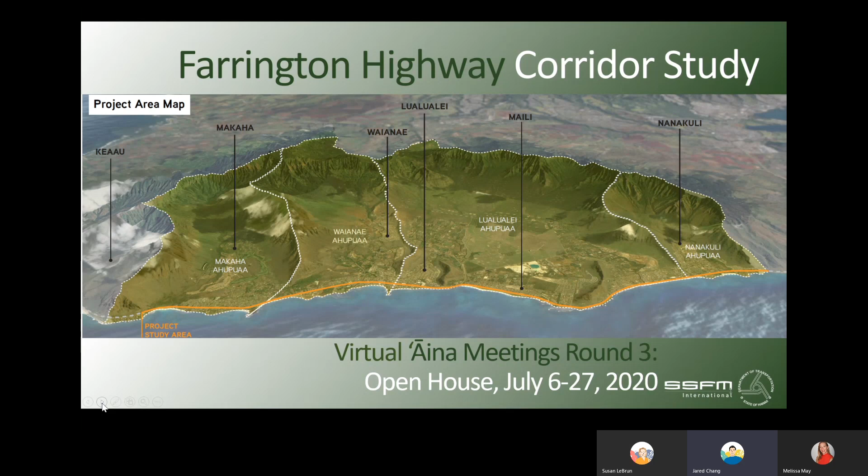We're going to start by introducing our project team and reviewing the presentation goals. This HDOT Highways Division study is being conducted by the Highways Planning Branch under Ken Tatsuguchi. The HDOT project manager is Patrick Tom, and he is supported by Jill Tanabe, Pua Ayu, and Shelly Kuneshige. SSFM International is the prime consultant for HDOT, and our team is led by Susan LeBrun with support by SSFM planners and traffic engineers, as well as a Westside community outreach team, including Puanani Burgess, Puaena Burgess, Pat Uchi Gakuyuchi, Dr. Lelemia Irvine, and Oceanit.

In this presentation, we will be providing a project status update and share what we have heard so far through community outreach. Then we'll present the proposed solutions, phasing, and priorities based on community input, and finally share how you can continue to provide your input to the project team. Goals for this meeting include continuing collaboration with the Westside communities to develop solutions for Farrington Highway, sharing back with you the community input that has been received so far, presenting the priority solutions for each community, and continuing community outreach on priorities and phasing via our online open house webpage and upcoming virtual Q&A sessions.

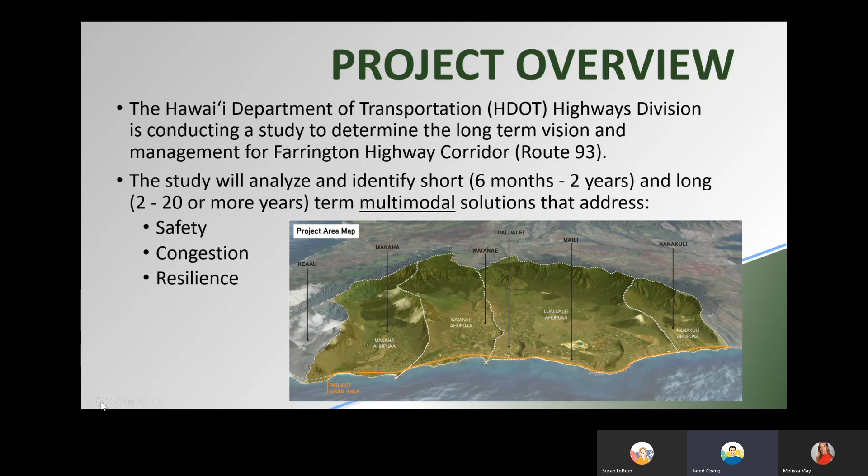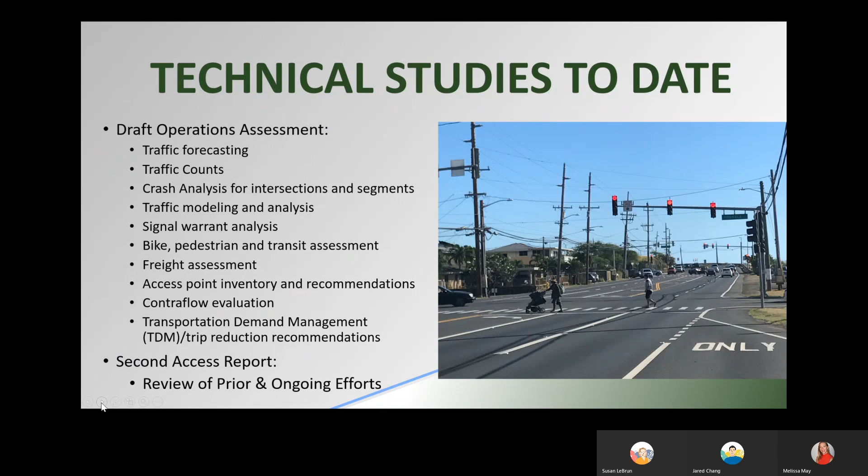Finally, as part of this project, we are working with Oceanit to engage students and teachers in a program that utilizes Oceanit's Aloha AI technology. This is a multi-session student program that they volunteer for to have students and teachers learn and use artificial intelligence to solve real-world problems and questions. The Aloha AI program is currently underway, and the sensors that they plan to use, which are cellular based, are being readied for implementation in July.

Once they collect the counts from these sensors, they'll be uploaded to an online database with access for each student. And the counts will be used to assist in this study, looking at each multimodal solution, as well as the 5th lane extension from Nānākuli up to Hakimo Road. And that concludes the quick update of the project status. I'm going to turn it over now to Melissa May, who's going to discuss the community mana'o that we've heard so far.

Aloha, everyone. My name is Melissa May. I'm a planner with SSFM, and I'm going to be going over some of the highlights of community input to date from all of our engagement efforts. And you can find the documentation from a lot of these prior meetings on the project website, which we'll list later in the presentation. But just a brief recap of what we've done so far.

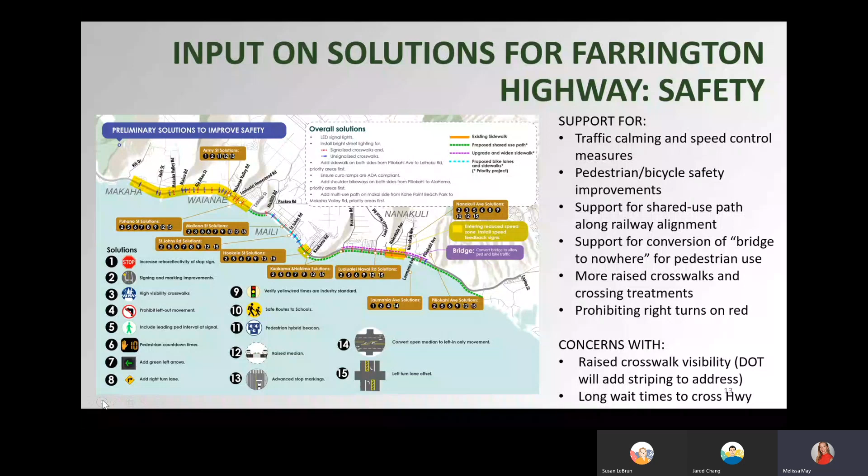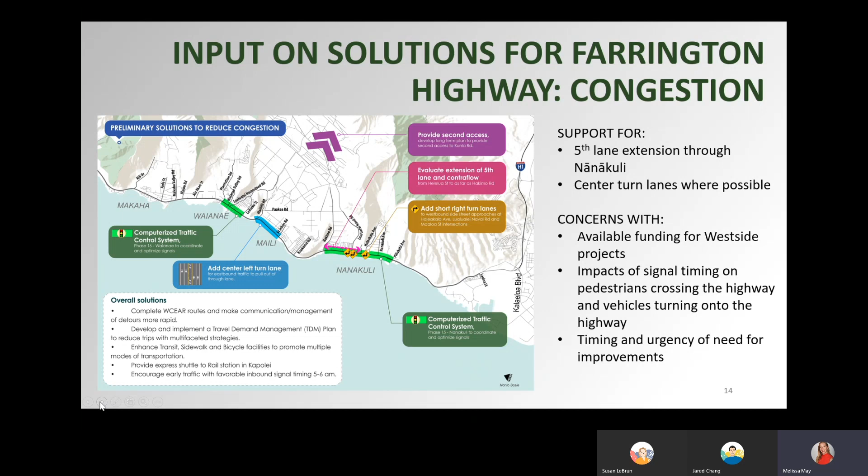They expressed concern about available funding for Westside projects, making sure that these projects are a priority and will get the funding. They also expressed concern about signal timing because the long wait times for pedestrians crossing the highway and cars trying to turn off of the side streets can be an issue. And just emphasizing the timing and the urgency of the need for improvements to this area.

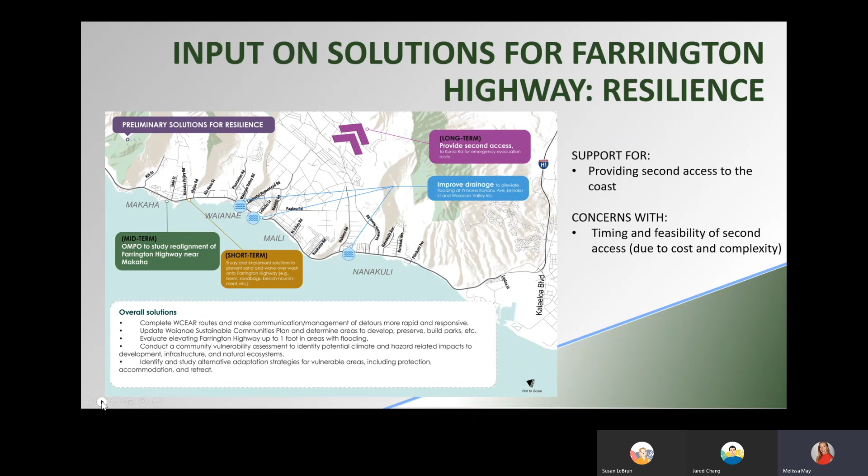And then finally, our discussion about resilience mainly focused on the second access and the need for long-term second access as a solution. And people understood and were concerned with the timing and the feasibility due to the cost and complexity and the multiple agencies that would be involved. We also talked about drainage as a solution to resilience. And with that, my portion of the presentation is over, and I will hand it over to Sue LeBrun.

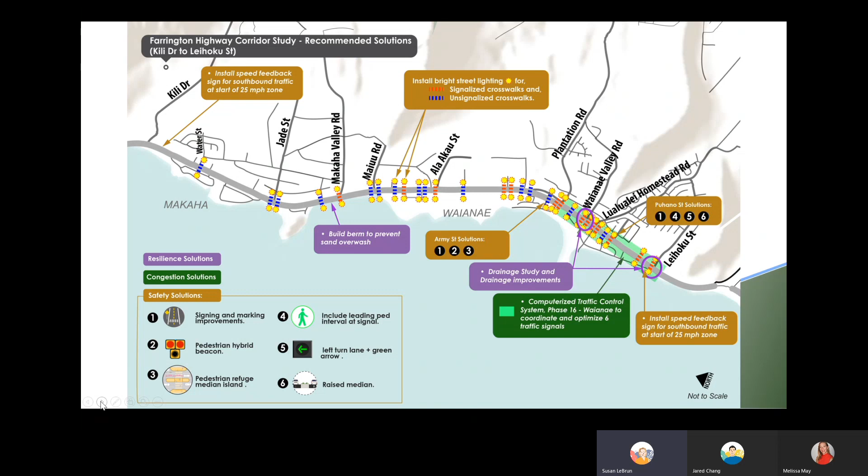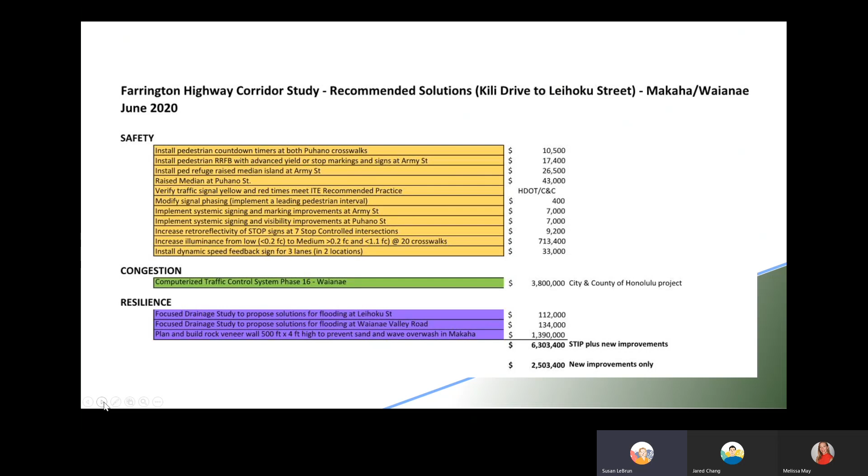Next slide. So we assigned costs to each of these improvements. And you can see them here divided into the safety, congestion, and resilience bins. And then on the next slide, we've prioritized them and given them phases 1 and phase 2. Phase 1 is more short-term, 6 months to 2 years, and that's something we can do quickly because it's within the right-of-way, and at least for those first ones, they're pretty low cost. And they have a high benefit to cost ratio, can be easily implemented.

Then there's the short-term medium cost for increasing the illuminance on the streetlights. There's 20 crosswalks. So this assumes a new pole at each end of each crosswalk. So it's getting up there to $700,000. And then for the computerized traffic control system, that's already a City and County of Honolulu project that's underway.

Then for the 2 to 5 year time frame, there's building the rock veneer wall at Mākaha Valley Road. That will probably be about a $1.4 million effort, but it will also need permitting because it's outside the right-of-way. However, it's needed, and people are getting sand on the road there and having to deal with that and removing it almost every day. So that could be considered an intermediate term priority. And then also the focused drainage studies at Leihoku Street and Waianae Valley Road.

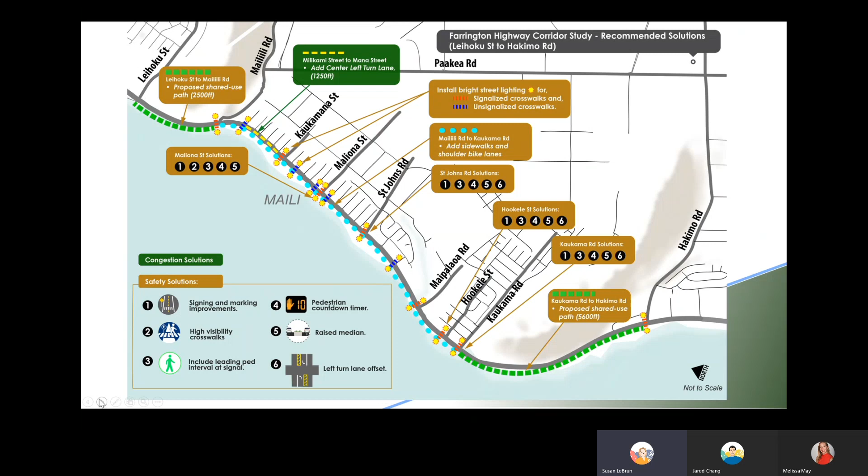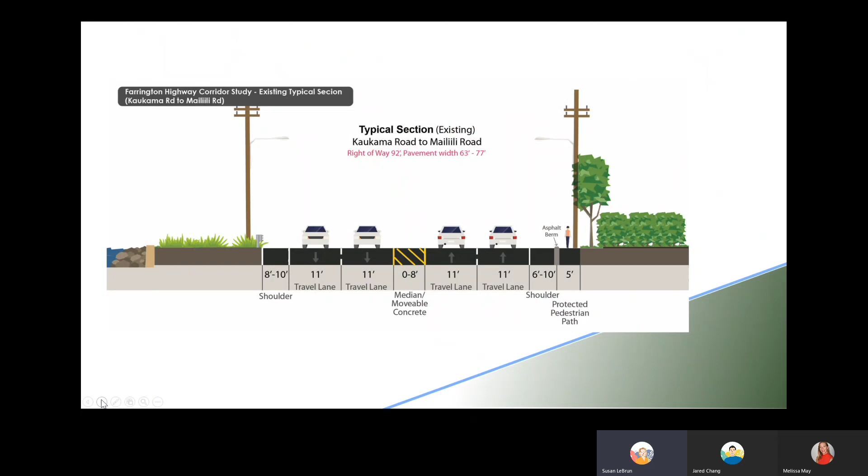So we've broken those costs, there's this typical section. This shows the existing section between Kaukama and Mailiili. And then the next slide shows the proposed. We already have the shoulders here, but on the next slide, you'll see that we're showing what it looks like with that center two-way left turn lane on that short segment. And also there's sidewalks on each side with curb and gutter. Next slide.

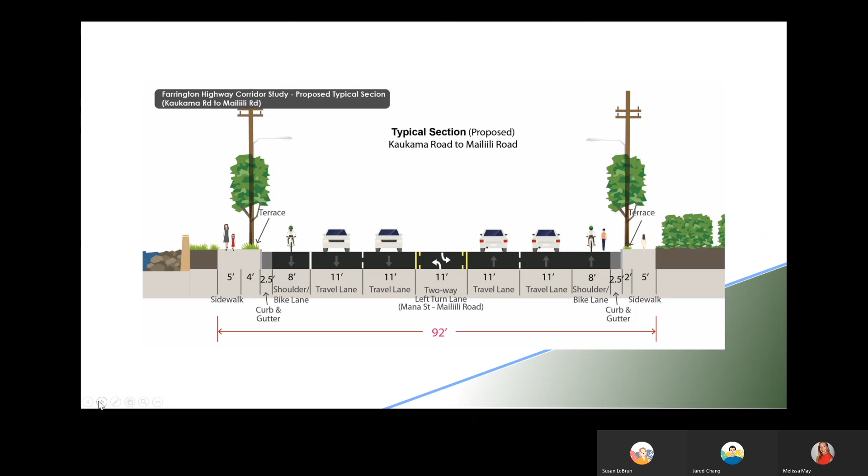We have these costs broken down into the safety and congestion bins. And then if you go to the next slide, we can see how they're phased. Phase 1 and 2, short term and intermediate term. The short term includes those quickly implemented low cost countermeasures with the high benefit to cost ratio. And then there's increasing the illuminance on the crosswalks and adding the center left turn lane for the medium cost.

And then in the short term we'd like to add in the computerized traffic control system in Mailiili for 7 signals, just as they're doing in Nānākuli and Waiʻanae. So then the intermediate term would be the shared use path segments from Mailiili to Leihoku and Kaukama to Hakimo. They are outside the right of way, so it will take more time for permitting and then survey and design.

Then finally, adding the sidewalk and shoulder bike lanes will take a little bit of time because there might be some right-of-way taking, and it just will take some time for survey and design and also budgeting that amount of money.

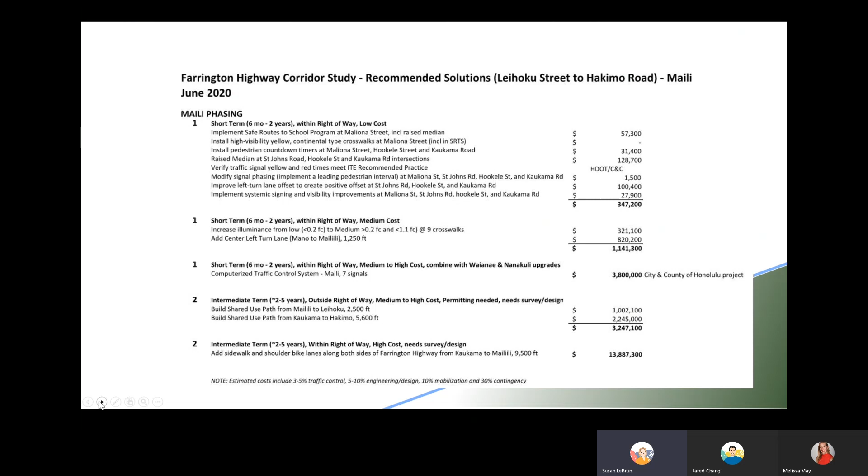All right, next slide. Finally, we get to Nānākuli. And in Nānākuli, we're recommending intersection improvements at 6 intersections. They're all signalized except for Laumania, which is stop controlled. And we're recommending to prohibit the left out movement there because of the crash history. And also it's easy for them to go over to Piliokahi to make that move.

We're also adding in the computerized traffic control system that's already being budgeted and worked on. And we're recommending to expand that to include La'aloa and Waiomea over near the southeast end of the project. We're recommending a short right turn lane at Haleakala for that side street coming in, so the right turners don't need to wait behind the left turners at that intersection. And then also recommending the speed feedback signs here for the 25-mile-an-hour speed limit zone.

Finally, the 5th lane is being planned between Helelua and Hakimo. And as they design that project, the hope is that they can also design in the shared use path and upgrade and widen the mauka sidewalk. There's drainage study and drainage improvements recommended at Princess Kahanu, and that too is within the 5th lane project. So hopefully that can all be packaged together. Next slide.

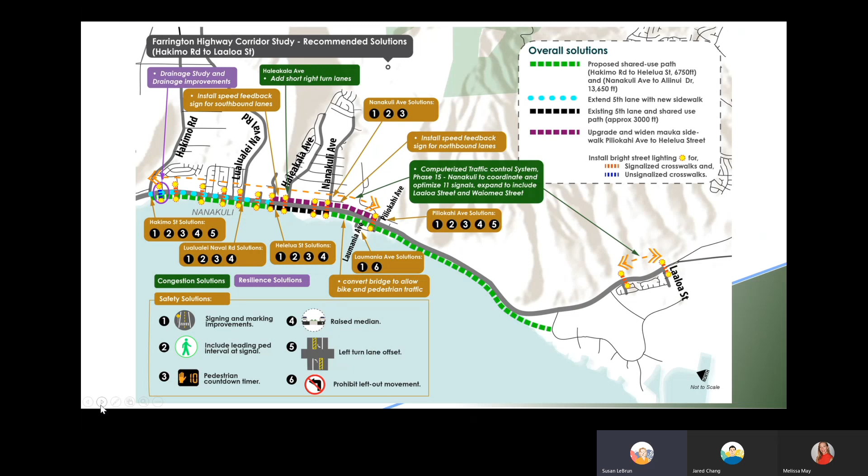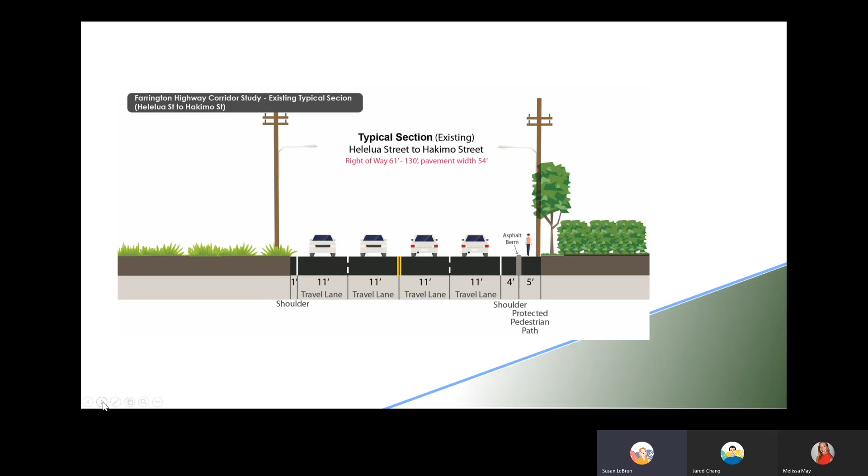We have a typical section of what it looks like right now. It's just the 4 lanes of traffic, a small shoulder and 5-foot protected pedestrian path on the mauka side and a 1-foot shoulder on the Makai side. Next slide. So you can see the center contraflow lane is planned, and then just additional shoulders, curb and gutter on the mauka side, and then the shared use path on the Makai side.

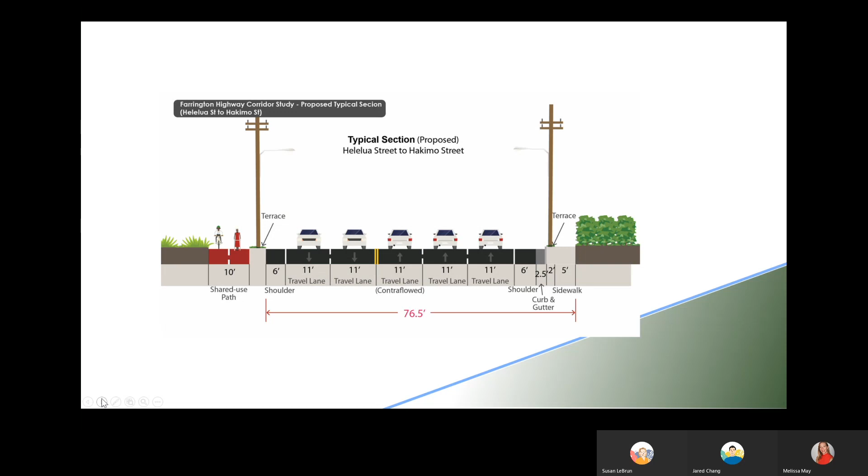Next slide. We separated the costs into the safety, congestion, and resilience bins. And then on the next slide, we're showing priorities and phasing, 6 months to 2 years, 2 to 5 years, and 5 to 10 years. Again, the short-term improvements include those low-cost countermeasures that can be easily implemented and have a high benefit to cost ratio. And we're adding lighting at 13 crosswalks, and this assumes all new poles. So it's possible there's poles and infrastructure that can already be used there, and then it would bring that cost down.

So the short term, that's more of a high cost, is the extension of the 5th lane. That project has already been earmarked with funding from the rental car surcharge. So timing could hinge on how quickly that money comes in. And then there's a computerized traffic control system that's already under design. And we're recommending to expand that to include those other 2 signals at La'aloa and Waiomea.

For the intermediate term, it would be building the shared use path in the segment from Nānākuli to Piliokahi, and then upgrading and widening the sidewalk from Piliokahi to Helelua is a $10 million project. It would take more time just to do the survey and design and budget for that. This one has a 3rd phase because it's longer term. The shared use path from Piliokahi to Ko'olina is about 10,000 feet, and it also involves 7 bridges, which will need more funding and more partnering with other agencies.